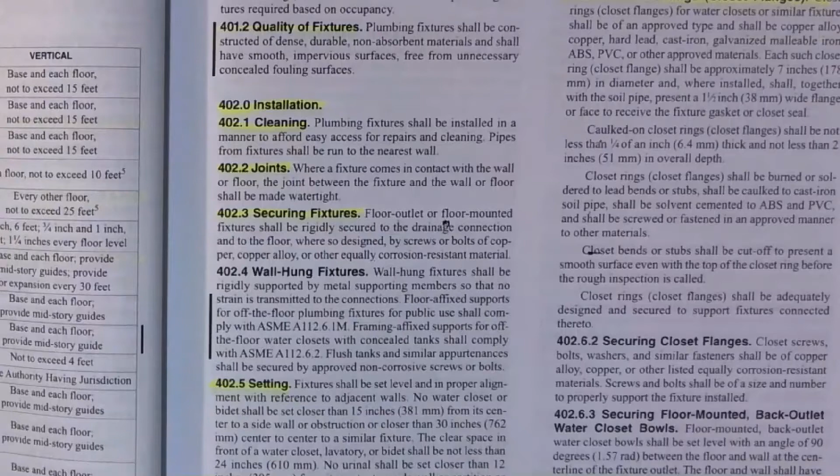Then we have Section 402.3, securing the fixtures. Floor outlet or floor mounted fixtures shall be rigidly secured to the drainage connection and to the floor where so designed by screws or bolts of copper, copper alloy, or other equally corrosion resistant material. We're going to cover that again, it's going to be repeated several times in the next few minutes. So they kind of deem it important to utilize some form of corrosion resistant material.

Section 402.5, setting. Fixtures shall be set level and in proper alignment with reference to the adjacent walls. No water closet or bidet shall be set closer than 15 inches from its center to a side wall or obstruction, or closer than 30 inches center to center to a similar fixture. The clear space in front of a water closet, lavatory, or bidet shall be not less than 24 inches. No urinal shall be set closer than 12 inches from its center to a side wall or partition, or closer than 24 inches center to center.

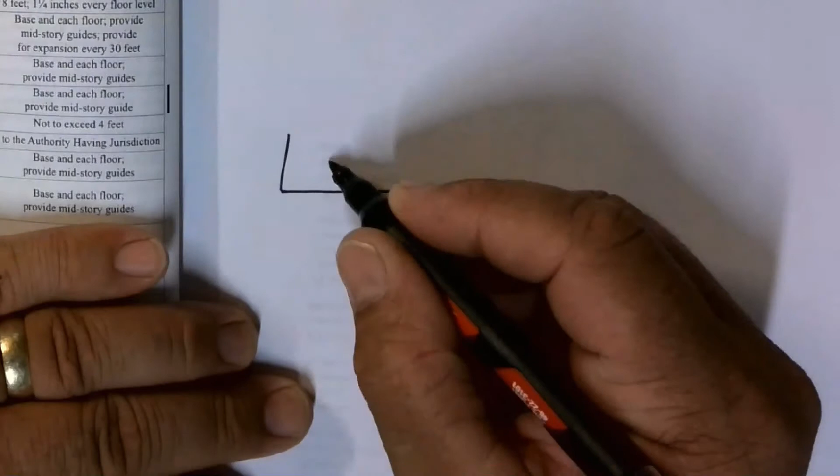So what that means is a water closet or toilet, the center of your water closet has to be no less than 15 inches. So we have a wall, and then we're going to have our water closet right there. There's your toilet. So this toilet from here to there is 15 inches, it can't be less than that. Plus it needs to be adjacent, which means it's running parallel to this side wall and adjacent to this back wall. That's what they mean by that.

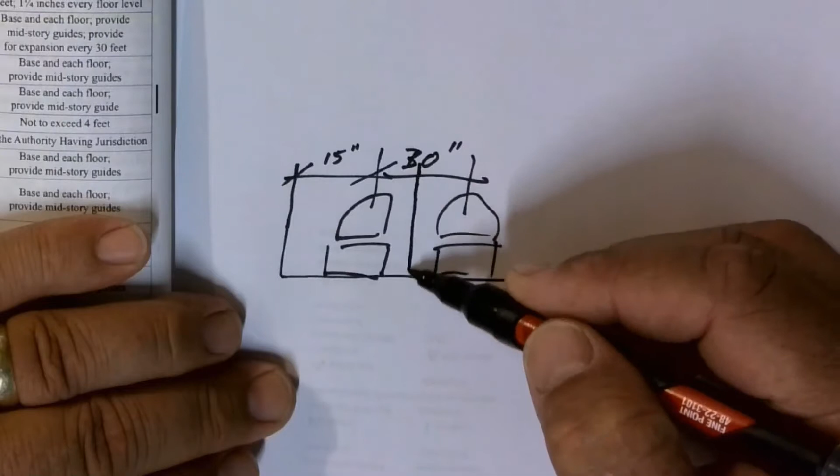And so if you had two toilets, what's the distance here? From its center to a sidewall or obstruction, or closer than 30 inches center to center to a similar fixture. So from here to here, 30 inches, okay? Because if you put a partition in here, that's 15 inches away. That's for the water closet.

The urinal, they make it 12 and 24. Keep in mind, everything that I mentioned in this lecture will probably be covered on the test. There is an exception: the installation of paper dispensers or accessibility grab bars shall not be considered an obstruction.

Section 402.6, flanged fixture connections. Fixture connections between drainage pipes and water closets, floor outlets, service sinks, and urinals shall be made using an approved copper alloy, hard lead, ABS, PVC, or iron flanges, caulked, soldered, solvent cemented, rubber compression gaskets, or screwed to the drainage pipe. The connection shall be bolted with an approved gasket, washer, or setting compound between the fixture and the connection. The setting compound is usually like a wax ring.

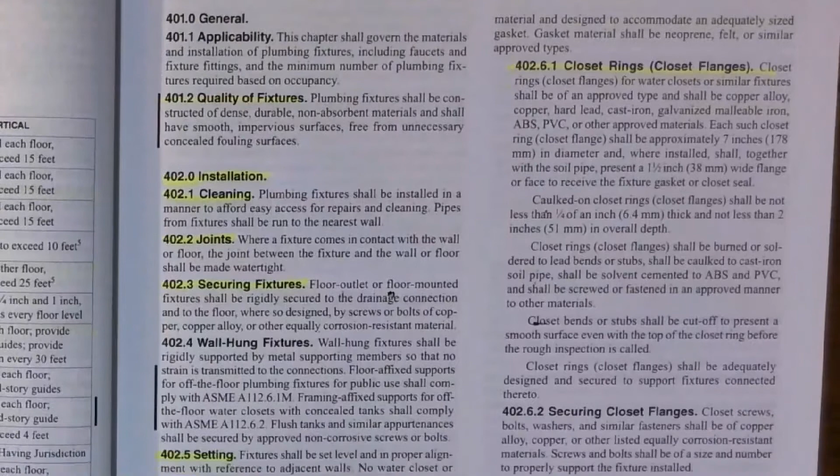Closet rings or closet flanges for water closets or similar fixtures shall be of an approved type and shall be copper alloy, copper, hard lead, cast iron, galvanized malleable iron, ABS, PVC, or other approved materials. Each such closet ring or closet flange shall be approximately 7 inches in diameter, and where installed shall together with the soil pipe present a 1.5 inch wide flange or face to receive the fixture gasket or closet seal.

That means from the edge of the hole outward is 1.5 inches on both sides, all the way around.

Caulked closet rings or closet flanges shall be not less than 1/4 inch thick and not less than 2 inches in overall depth. Closet rings or closet flanges shall be burned or soldered to lead bend or stubs, shall be caulked to cast iron soil pipe, shall be solvent cemented to ABS and PVC, and shall be screwed or fastened in an approved manner to other materials. The closet bend or stub shall be cut off to present a smooth surface even with the top of the closet ring before the rough inspection is called.

Closet rings shall be adequately designed and secured to support fixtures connected thereto. So it needs to be, like I said earlier, the bottom of the flange shall be set on an approved firm base because it needs to be secured and supported. You need to be able to secure and support your fixtures. And then it talks about securing your closet flange by using corrosion resistant materials.

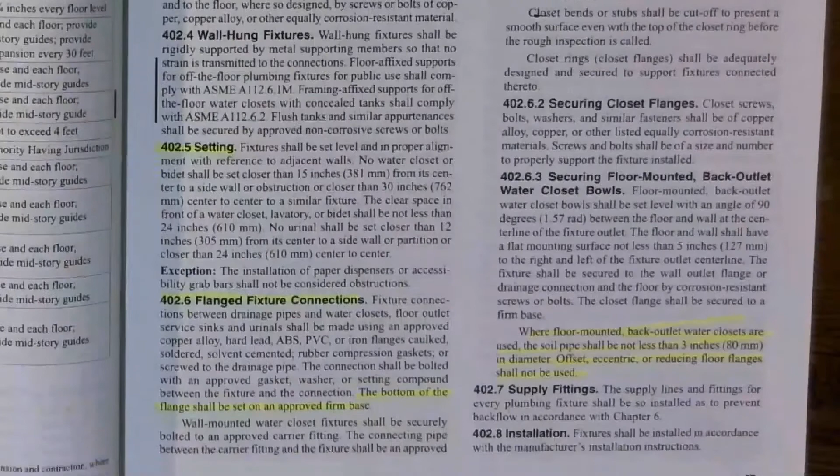402.6.3, securing a floor mounted back outlet water closet bowl. Floor mounted back outlet water closet bowls shall be set level with an angle of 90 degrees between the floor and the wall at the center line of the fixture outlet. The floor and wall shall have a flat mounting surface not less than 5 inches to the right and left of the fixture outlet center line. The fixture shall be secured to the wall outlet flange or drainage connection and the floor by corrosion resistant screws or bolts. The closet flange shall be secured to a firm base. Where floor-mounted back outlet water closets are used, the soil pipe shall be not less than 3 inches in diameter. Offset, eccentric, or reducing floor flanges shall not be used.

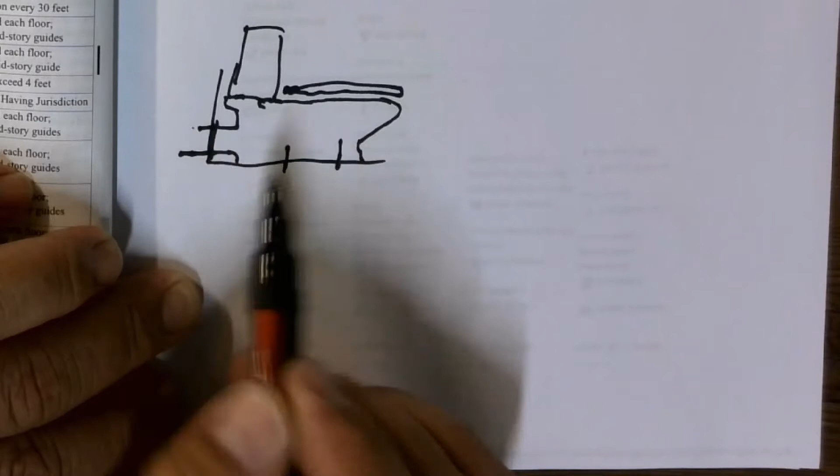First off, real quick, here you have a different type of water closet. It's floor mounted, so it does get mounted on the floor. However, the waste - so there's my crude attempt at a water closet. Your bolts go in here and they get mounted onto the floor. But it's a back outlet, so it comes out the wall right here, and your waste goes out there instead of this way. So that's what I mean by a wall outlet, floor mount water closet.

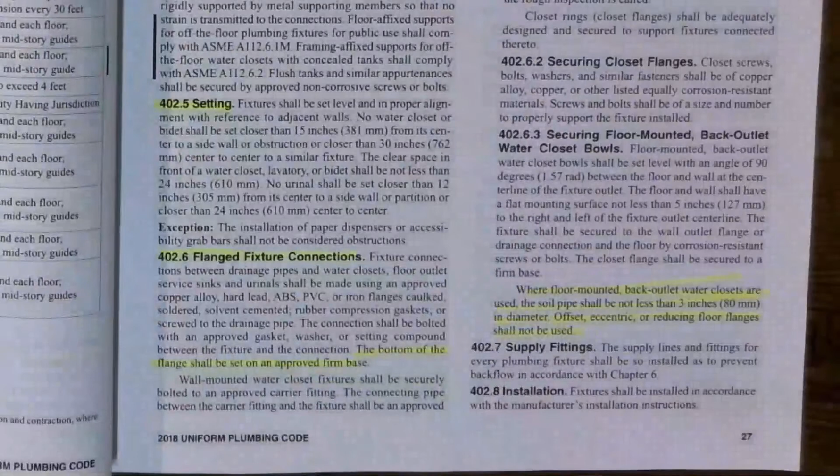Let's turn the page and go over here. 402.10. Fixtures having concealed slip joint connections shall be provided with an access panel or utility space not less than 12 inches in its least dimension and so arranged without obstructions as to make such connections accessible for inspection and repair. And we talked about slip joint couplings before, or a slip joint connection.

All it really is, is a threaded connection, where the tubing goes into one side and a compression fitting tightens it up. You cannot hide those.

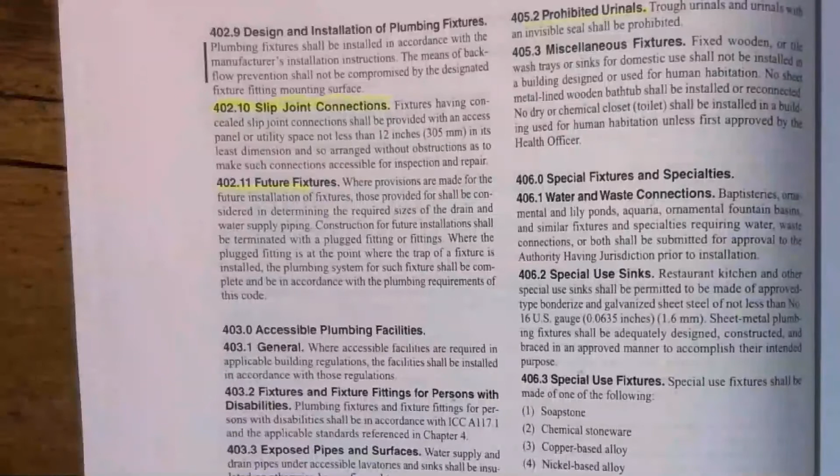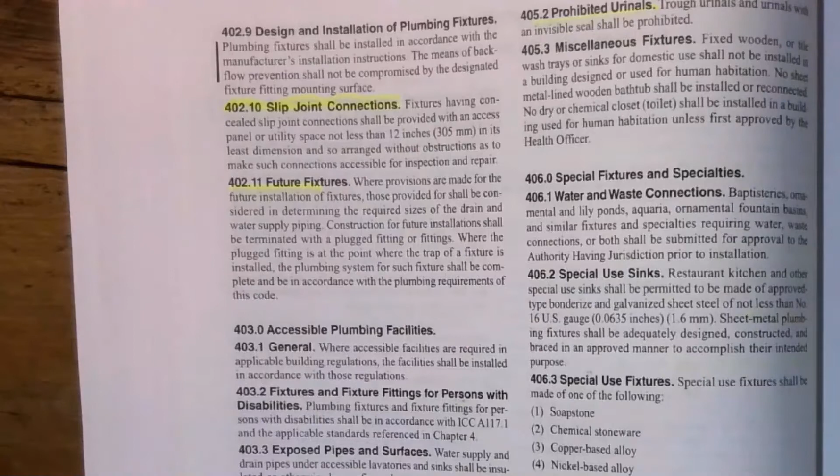Future fixtures. Where provisions are made for the future installation of fixtures, where you're going to put something in, those provided for shall be considered in determining the required sizes of the drain and the water supply piping. So whatever type of future fixture you're planning on putting in, you need to make sure you know what the requirements are so you can properly run that size. The construction for future installation shall be terminated with a plugged fitting or fittings. Where the plugged fitting is at the point where the trap of a fixture is installed, the plumbing system for such fixture shall be complete and be in accordance with the plumbing requirements of this code. So if you're going to be putting in a future fixture, you need to make sure you know exactly the right size, what it's going to take, what kind of volume it has, and you're going to have to implement that into your sizing calculations to make sure that your system doesn't get starved out after installing it at a later date.

We're going to talk a little bit here about overflows. Where a fixture is provided with an overflow, the waste shall be so arranged that the standing water in the fixture shall not rise in the overflow where the stopper is closed or remain in the overflow where the fixture is empty. The overflow pipe from a fixture shall be connected to the house or inlet side of the fixture trap, except that overflow on flush tanks shall be permitted to discharge into the water closets or urinals served by them, but it shall be unlawful to connect such overflows with any part of the drainage system. So we have a couple of things here.

See if I can explain it to you in such a way that makes total sense.

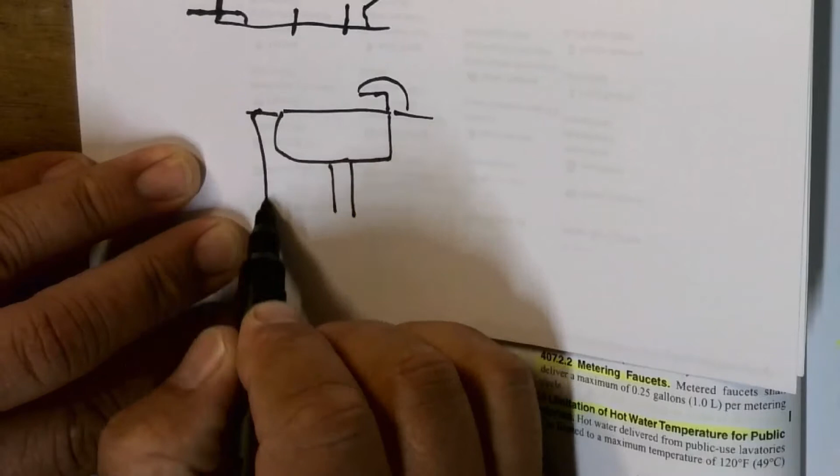So here we have a lav. We'll put our little faucet right here. So there's your faucet, there's your lav, and here's your waste coming down, which is your fixture drain. On the front face, because this is the front of the counter, and this will be the top backsplash. Okay, so right here you have a couple of holes right there on the lav. Those are your overflows. Those are connected to an overflow pipe that's either built into the lav or external. And that ties into the fixture drain right here.

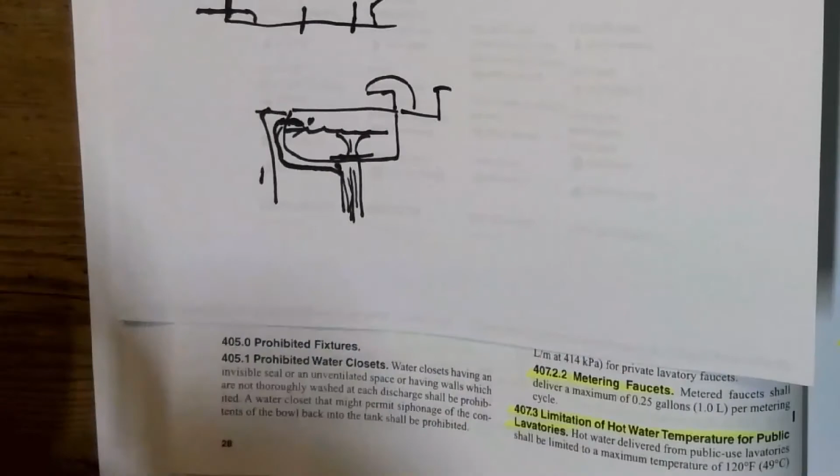So if you do plug it and the water level rises, this plug is not going to inhibit this overflow from taking the water and draining it out. And when you do unplug it and all the water goes down, this overflow will stay open. So that's what those little holes are right there for the lav. That is to ensure that this water doesn't kind of creep up over the flood level rim and drain out over the counter. The other one they were talking about is the overflow for a water closet.

If you open up the tank of a water closet, you'll see you have the flush control, and it's got the little ball deal on there, and it's got the little diaphragm, and that is connected on the bottom. And then you have this overflow that's right in the middle, and it's a hole. It's a pipe with a hole on it. But on that, you also have the flapper, and then the drain itself. So all the water goes down inside here, and then this flapper drops back down, and the water level rises until this float stops it.

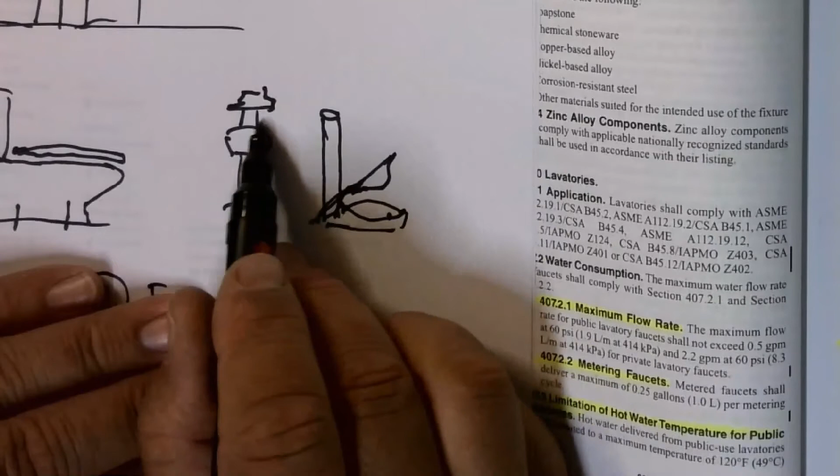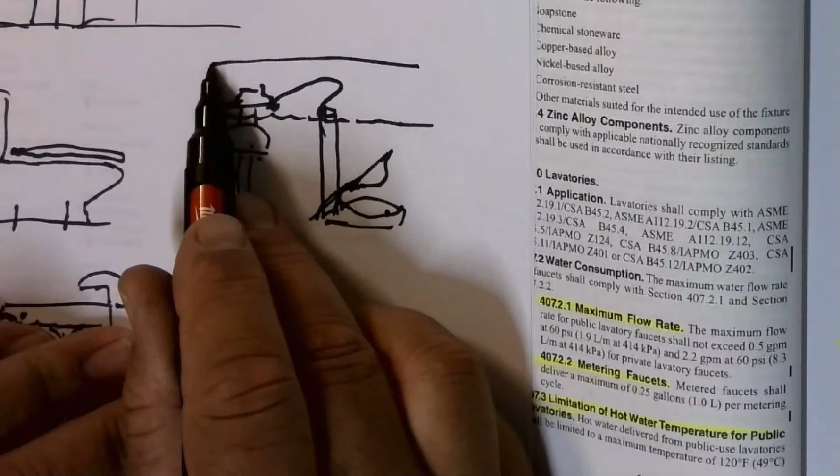This is the top of the tank right there. If the water level rises inside the tank and it goes over this overflow - oh, there's also a little hose that runs over to this point and drains down inside here. This is aiding inside the bowl. This is filling water into your overflow, which is kind of scouring the bowl as it's filling. So that's what this does here. And this overflow, if this water continues to go, you're not going to go ahead and overflow your tank. This is going to go into the bowl and drain out. So those are the two things about the overflows.

Wow, there we go. I wanted to mention this, section 405.2. Trough urinals and urinals with an invisible seal shall be prohibited.

It was a sad day when that came out because I can remember the trough urinals. It was like a meet and greet, you know, you just show up and stand there next to somebody and ask them how their day was while you were relieving yourself. It was sad, but I understand why, because it's disgusting.

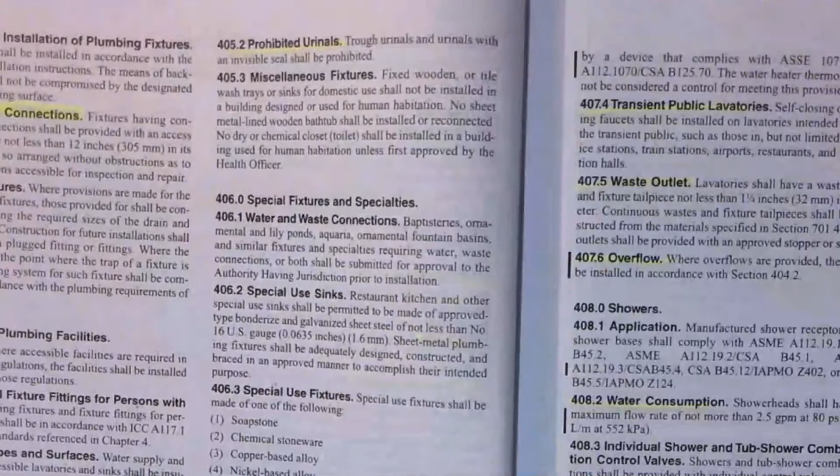So I'm going to post a couple of videos next to this link for this chapter, and it's going to show a couple of urinals that are pretty unique. One of them is at a place called the Madonna Inn, and it's really cool. I was told by my Plumbing 1 instructor about it, and it just so happened to coincide with my honeymoon. And on my honeymoon, driving up north, it's up in San Luis Obispo, I told my wife that we needed to stop off at this place just so I could use the bathroom. And I went in, and it was a freaking cool bathroom. It was really neat. So I'm going to show you a video of it, or at least put it next to this link, and you will like it. It's pretty cool. It's pretty neat.

Bottom line is, I went to go use the bathroom, and while I was using that urinal, two old ladies came in to ask if they could film or take a picture of the attraction, and I thought they were talking about me, but they were actually talking about the urinal.

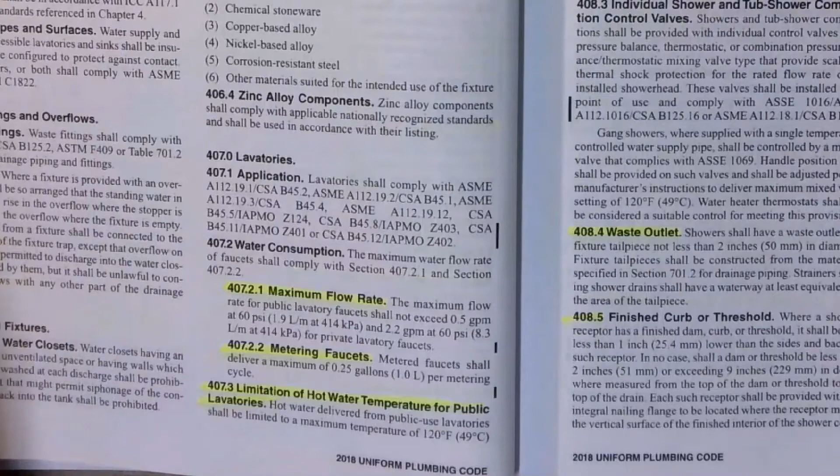Section 407.2.1, maximum flow rate. Now we're here talking about section 407. Section 407 is lavatories, and a lavatory is the sink that's in the bathroom, used for washing your face.

So the maximum flow rate for a public lav faucet shall not exceed 0.5 gallons per minute at 60 psi, and 2.2 gallons per minute at 60 psi for a private lav faucet.

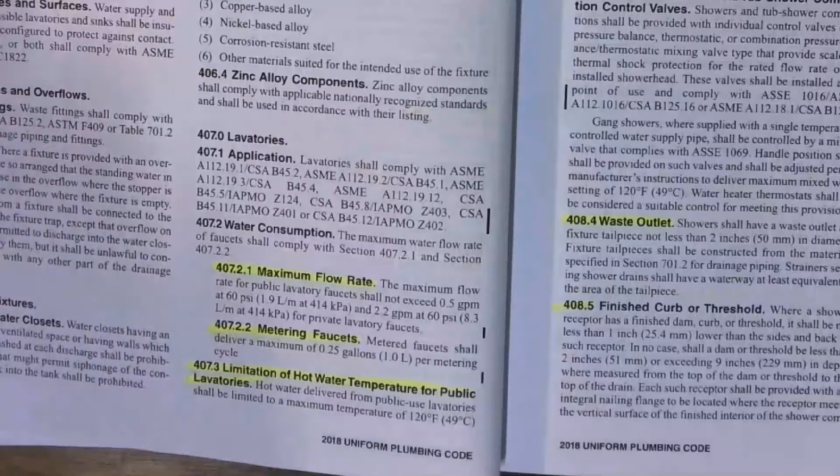Now we have metered faucets, section 407.2.2. They shall deliver a maximum of 1/4 of a gallon per metering cycle. In other words, those are the ones that come on automatically, or you have to press down and it'll supposedly last you at least 1/4 of a gallon.

I tell you, over time, those faucets where you have to press the button and keep it going need to be adjusted. How many of you have gone down and depressed it, had to keep your hand on it, then realize that isn't going to work, so now you have to keep your elbow on it while trying to contort your hand underneath the water flow to wash it. It's awful.

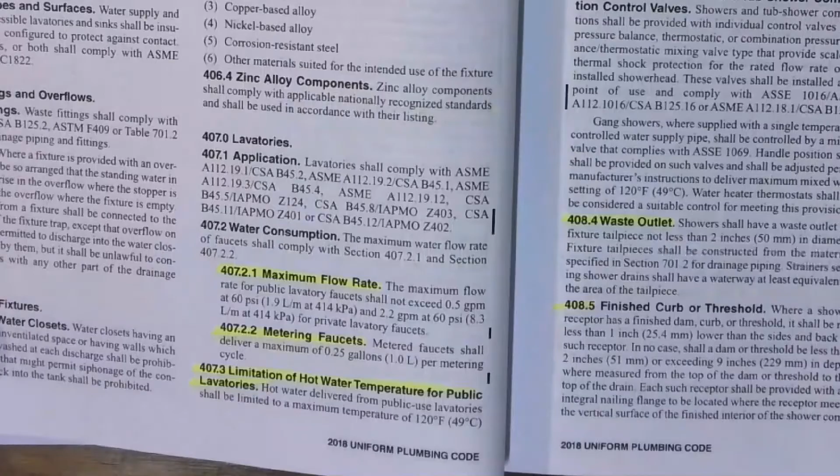And then the limitation of hot water temperature for a public lav. Hot water delivered from public use lavs shall be limited to a maximum temperature of 120 degrees Fahrenheit by a device that complies with the following standards. And the water heater thermostat shall not be considered a control for meeting that provision.

And then transient public lavatories, section 407.4. A transient public lav is one meant for the general public, where they're just in and out. It's not like a public restroom in a restaurant or anything like that. This is one that's out there, like the one at the beach or the park. That's what they're talking about here.

Self-closing or metering faucets shall be installed on lavatories intended to serve the transient public, such as those in, but not limited to, service stations, train stations, airports, restaurants, and convention halls.

Waste outlet: lavatories shall have a waste outlet and fixture tailpiece not less than 1.25 inches in diameter. The continuous waste and fixture tailpieces shall be constructed from the material specified in section 701.4. So everything that pertains to waste is always going to reference chapter 7 as far as materials go, because chapter 7 is sanitary drainage.

Waste outlets shall be provided with an approved stopper or strainer. And then the overflow: where overflows are provided, they shall be installed in accordance with section 404.2, which we already went over.

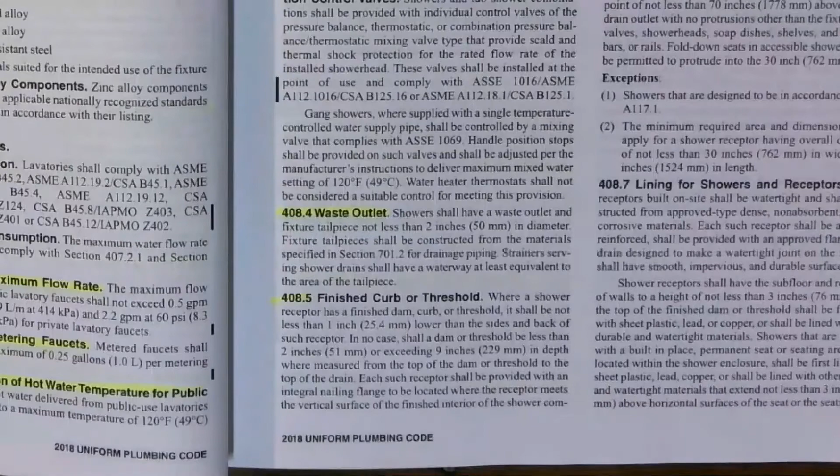What they mean by that is all the holes that are in the strainer at the bottom of the shower, your drain, all those holes have to equal the measurement of your pipe.

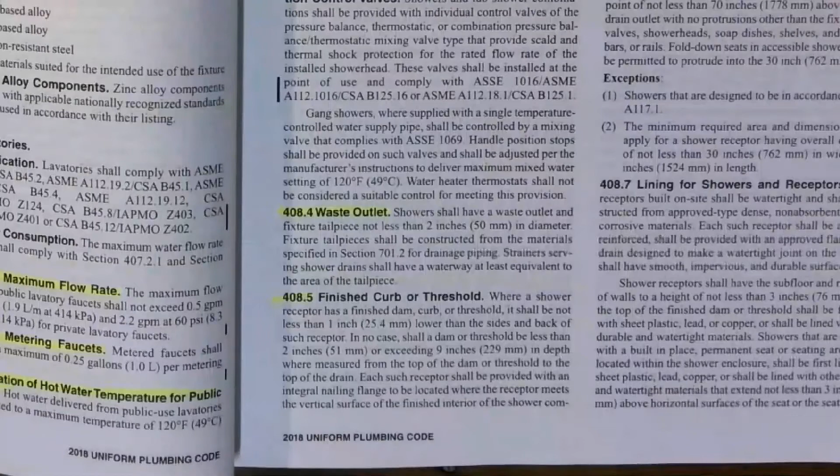Waterway at least equivalent to the area of the tailpiece. So if it's a 2-inch tailpiece, which it is because it says so right here, all those little holes, when you add them all up, need to equal the same surface area as a 2-inch tailpiece. The finished curb or threshold.

Where a shower receptor has a finished dam, curb, or threshold, it shall be not less than 1 inch lower than the sides and the back of the receptor. In no case shall a dam or threshold be less than 2 inches or exceed 9 inches in depth, measured from the top of the dam or threshold to the top of the drain. So when you measure from the top of the dam to the actual drain itself, it's 2 inches minimum and not more than 9 inches deep. The dam itself is not less than 1 inch lower than the sides and back of the receptor.

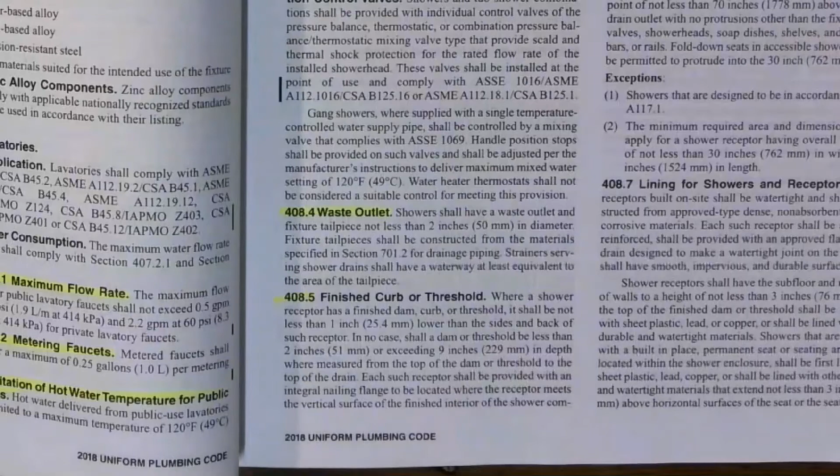Each such receptor shall be provided with an integral nailing flange to be located where the receptor meets the vertical surface of the finished interior of the shower compartment.

The flange shall be watertight and extend vertically not less than 1 inch above the top of the sides of the receptor. The finished floor of the receptor shall slope uniformly from the sides towards the drain, not less than 1/8 of an inch per foot, nor more than 1/2 inch per foot.

The threshold shall be of sufficient width to accommodate a minimum 22-inch door. So your door is a minimum of 22 inches. The shower door shall open so as to maintain not less than a 22-inch unobstructed opening for egress. So not only is your door a minimum of 22 inches, but the entryway has to be at least 22 inches.

The immediate adjoining space to showers without thresholds shall be considered a wet location and shall comply with the requirements of the building, residential, and electrical codes. The exceptions are showers in accordance with section 403.2.

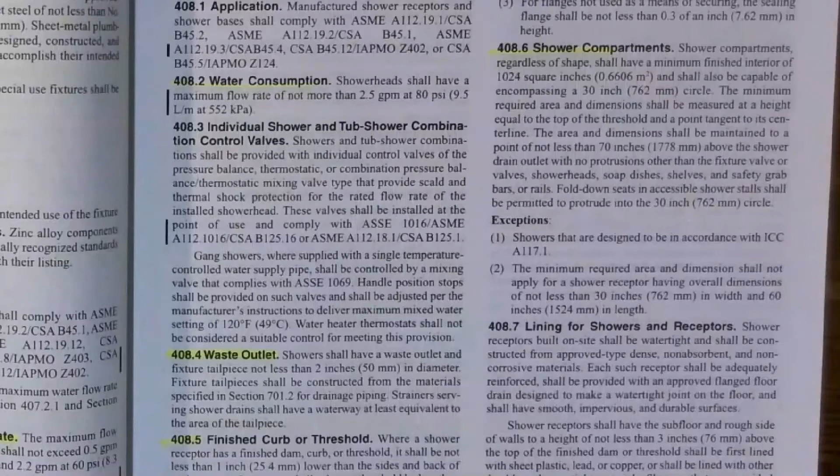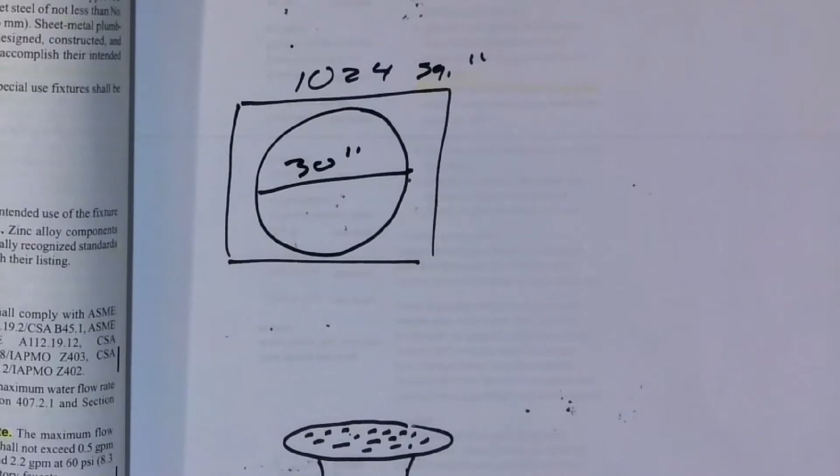So that whole code section essentially just says this. So here we have a shower stall, okay? And the minimum requirement for that shower stall is 1,024 square inches. In this square, you have to be able to have a 30-inch circle. It has to be in there.

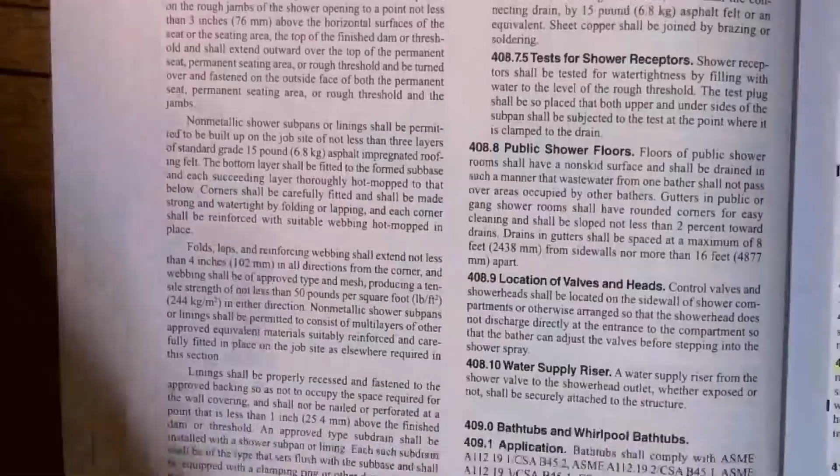We'll go ahead and turn the page. Come over here. Remember I told you that section 408 was the largest one? Because here we're talking about making the shower pans using PVC, CPE, sheet lead, sheet copper. All of this pertains to making your shower receptor, including the tests, and all kinds of stuff.

Now, this one I should have highlighted because I wanted to share this with you, and I apologize. Public shower floors. Floors of public shower rooms shall have a non-skid surface and shall be drained in such a manner that wastewater from one bather shall not pass over areas occupied by other bathers. Keep your wastewater to yourself.

The gutters in a public or gang shower room shall have rounded corners for easy cleaning and shall be sloped not less than 2% toward the drains. The drains in the gutters shall be spaced at a maximum of 8 feet from the sidewalls, nor more than 16 feet apart.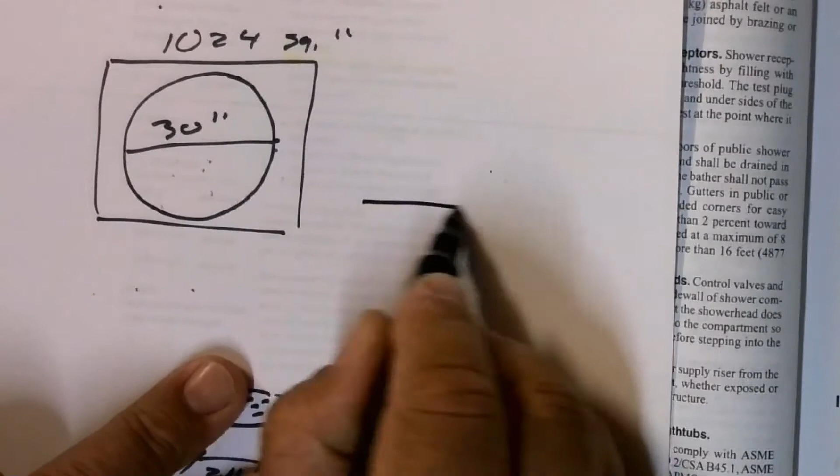So cross-section area here, you have a gutter like this. So the person stands here, and we're going to give him some shorts, because we're just giving him shorts. So he stands there, he gets his shower. His water goes into this drain, and this drain has several drains all over the place. They go to the back wall, and then they get vented, the whole bit. Okay?

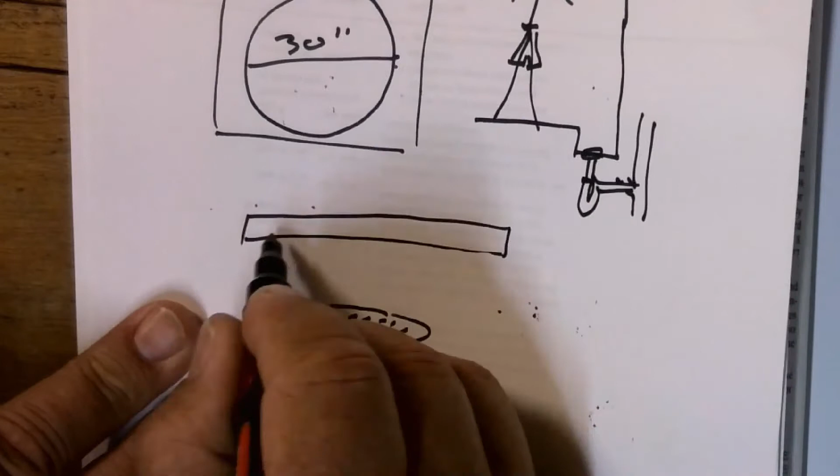Cross-section area of the gutter itself, we'll say we have one there, and this is 8 feet, and that's 8 feet, because that is the maximum distance they can go, okay? Can they be closer? Yes, they can, because it says right here, a maximum of 8 feet from the sidewall. So they can be closer than 8 feet, but it goes at 2%. And if I have one more right here, spread at the maximum distance, okay?

So let's say I have 3 drains. What is the maximum distance this gutter can be? Well, the spread between drains is 16 feet. So here we have 16, 32, 48 feet, right? 48 feet for 3 drains. That's a lot. That's a lot of showers, okay?

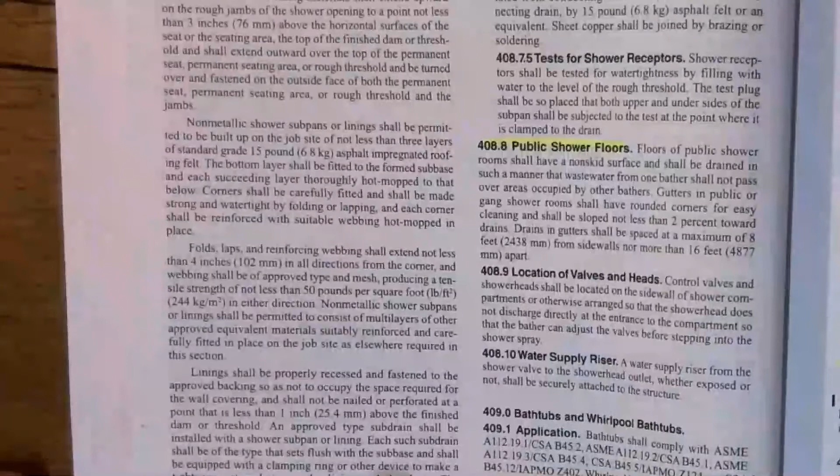So I wanted to go over that section.

Now we can talk about bathtubs and the waste outlet for a bathtub. Bathtubs and whirlpool bathtubs shall have a waste outlet and fixture tailpiece not less than 1.5 inches in diameter. Fixture tailpieces shall be constructed from the material specified in section 701.2 for drainage piping. The waste outlet shall be provided with an approved stopper or strainer.

So a bathtub drain is 1.5 inches and the shower is 2 inches. The reason is the shower has a smaller area for the water to collect, and if you run a 1.5 inch drain, the water will start to rise and go over the shower receptor itself. So the shower drain requires a larger size in order to maintain that there's no standing water.

A bathtub is 1.5 inches because it has the overflow, and the overflow for the bathtub is there. Plus it's a standing water setup anyway, and it's designed to maintain a section of standing water.

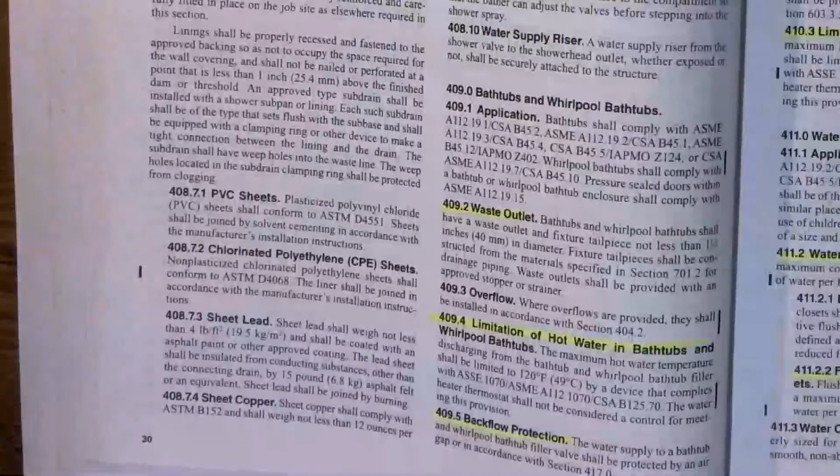The limitation of hot water in a bathtub and a whirlpool tub: the maximum hot water temperature discharging from the bathtub and whirlpool bathtub filler shall be limited to 120 degrees by a device that complies with the following standards. The water heater thermostat shall not be considered a control for meeting this provision.

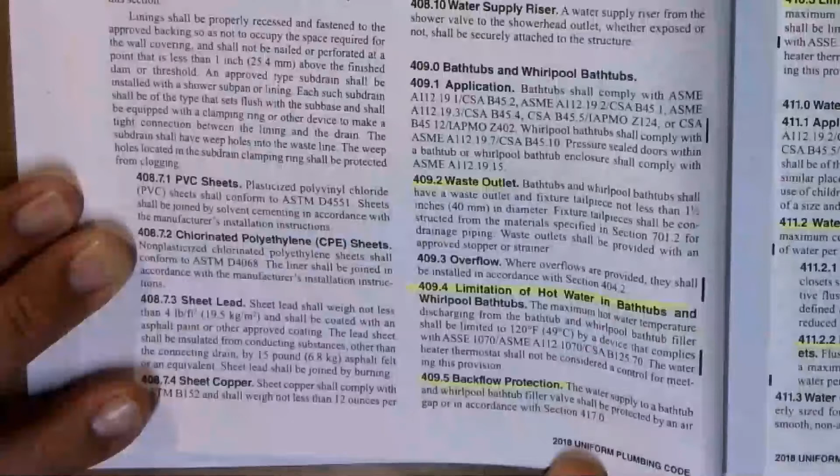Backflow prevention or protection: the water supply to a bathtub and whirlpool bathtub filler valve shall be protected by an air gap, or in accordance with section 417. So you have to have an air gap, which is fine because the spout that comes out for the bathtub usually sits a few inches above the flood level rim anyway, and that's because it's providing you with your air gap.

I used to work with a guy who called a bidet a bidet. And I told him, it's not a bidet, it's a bidet. And he's like, well, I always heard bidet. And I said, no, that's the guy on the radio commercials for the Motel 6. Tom Bodett will keep the light on for you. I don't know if any of you remember that commercial, but...

Section 410.3, limitation of water temperature in a bidet. Up until this point, the hot water has been limited to 120 degrees for everything, but the bidet is different. The maximum hot water temperature discharging from a bidet shall be limited to 110 degrees by a device that complies with the following standards, and again the water heater thermostat shall not be considered the control for meeting that provision. You want less than 110 because it starts to get a little warm, and that area where the bidet operates is a bit of an anatomical sensitivity location.

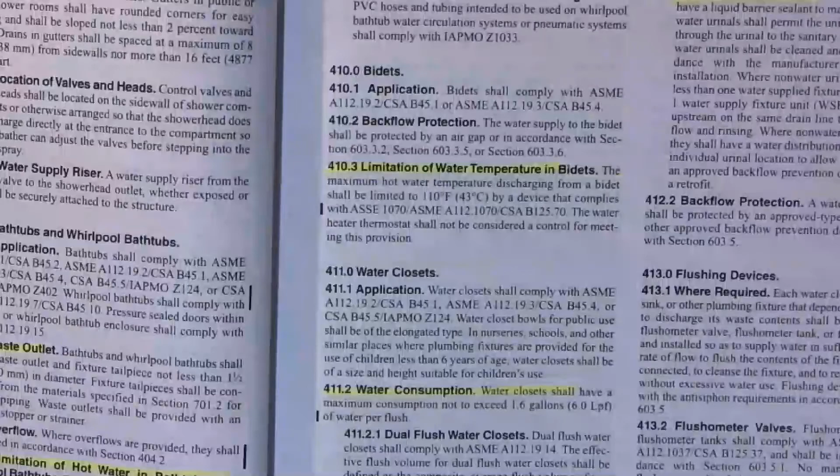Water closets, section 411. 411.2 water consumption: based on this code, water closets shall have a maximum consumption not to exceed 1.6 gallons of water per flush. Then down to the flushometer valve activated water closet—these are your commercial water closets. The flushometer valve activated water closet shall have a maximum flush volume of 1.6 gallons per flush.

I like talking about these urinals. Urinals, based on this code—now I've installed plenty that have less than this, okay—urinals shall have an average water consumption not to exceed 1 gallon of water per flush. I have put in half gallon per flush, okay, and again this is based on the Uniform Plumbing Code.

Most places where you install urinals have it specified that you're going to use low consumption or non-water urinals. I'm reading you this section because I think this is one of the more important sections in this chapter, okay? Non-water urinals shall have a liquid barrier sealant to maintain a trap seal. Non-water urinals shall permit the uninhibited flow of waste through the urinal to the sanitary drainage system. Non-water urinals shall be cleaned and maintained in accordance with the manufacturer's instructions after installation.

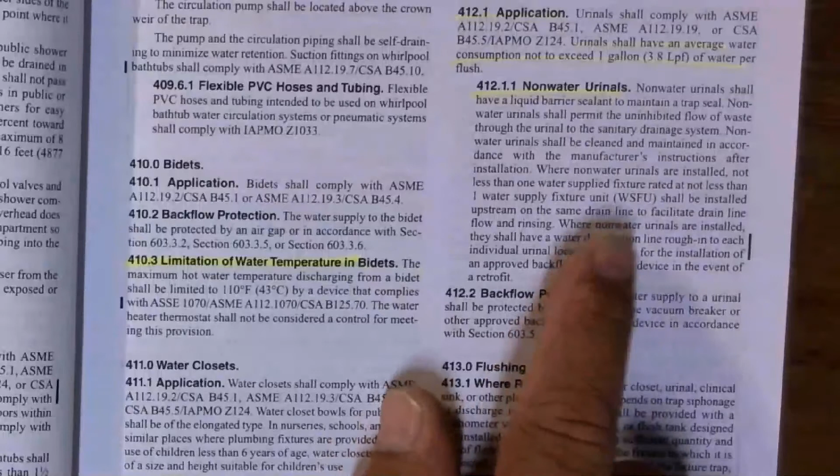So this last sentence here: you still have to run the water line. You just don't connect it to a flush valve. You have to run it, and it has to be behind the wall. They call it 'in the event of a retrofit.' I call it when they come to their senses and realize what a mistake they made putting in one of these non-water urinals to begin with. The water's there—they can just open up the wall, hook up their flush valve, and call it good.

That's it for this page. We're almost done. Almost. I don't know why I always do that.

Dishwashing machines. Section 414.2.

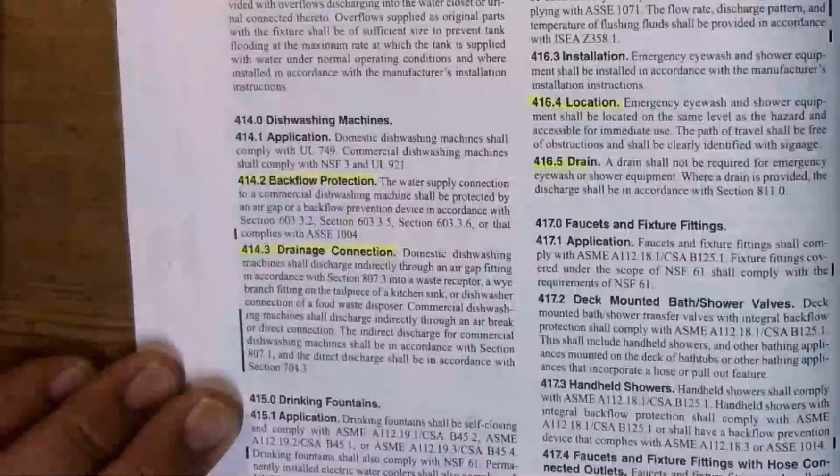The water supply connection to a commercial dishwashing machine shall be protected by an air gap or backflow prevention device in accordance with Section 603.3.2, Section 603.3.5, Section 603.3.6, or that complies with ASSE 1004. So you have to have some form of a back check so that the water being supplied into the commercial dishwashing machine—now it's commercial—is protected.

Drainage connection. Domestic dishwashing machines shall discharge indirectly through an air gap fitting in accordance with Section 807.3 into a waste receptor, a Y-branch fitting on the tailpiece of a kitchen sink, or a dishwasher connection of the food waste disposer.

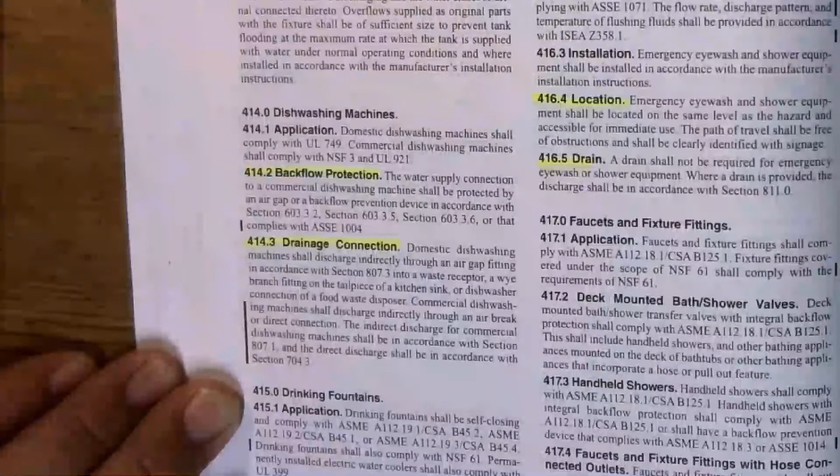The commercial dishwashing machine shall discharge indirectly through an air break or direct connection. The indirect discharge for a commercial dishwashing machine shall be in accordance with Section 807.1, and the direct discharge shall be in accordance with Section 704.3.

That's for commercial. I'm interested in the domestic. That domestic dishwashing machine has to go through an air gap fitting. Remember this—this is required. Now what I'm saying about this is because I get a lot of questions on this one. A lot.

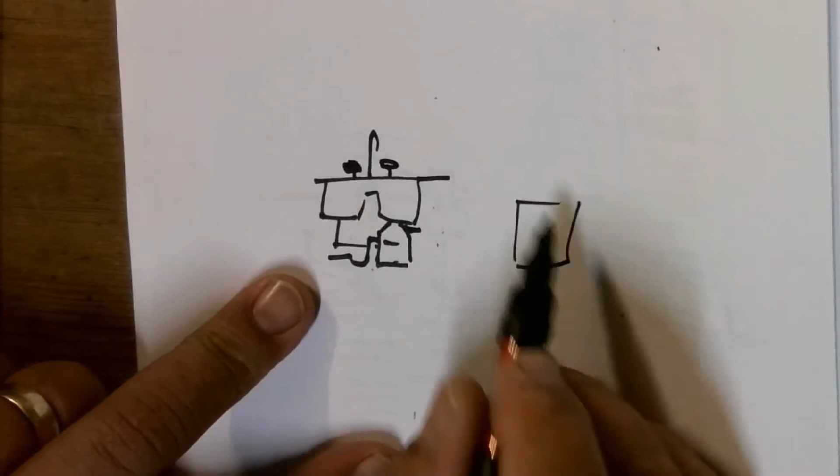Dishwasher. Sink over here. Garbage disposal, right? So here's a little outlet right there. So here's your sink. This dishwasher discharge on the drain has to go up to an air gap, and then from there it needs to go down and tie in to the garbage disposal connection.

The argument is we don't need this—we just need to take this discharge. The manufacturer says all we have to do is take this and run it up as high as we possibly can underneath the counter and bring it all the way back in. Well, that's fine, the manufacturer can say that.

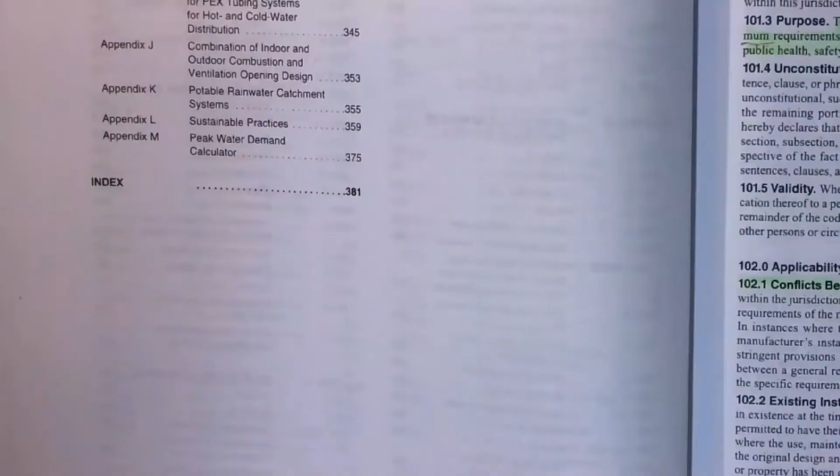But based on our municipality, based on the state of California and their adoption of this code, this is the more stringent requirement. Now remember, going all the way back to Chapter 1, we'll read this section right here.

Where there is a conflict between a general requirement and a specific requirement, the specific requirement shall prevail. And where the requirements within this jurisdiction of the plumbing code conflict with the requirements of the mechanical code, this code shall prevail. In instances where this code, applicable standards, or the manufacturer's installation instructions conflict, the more stringent provision shall prevail. Well, guess what's more stringent?

This is more stringent because you actually have to install an air gap. The other one, you don't. So this is the way you have to do it, based on this chapter and Chapter 1.

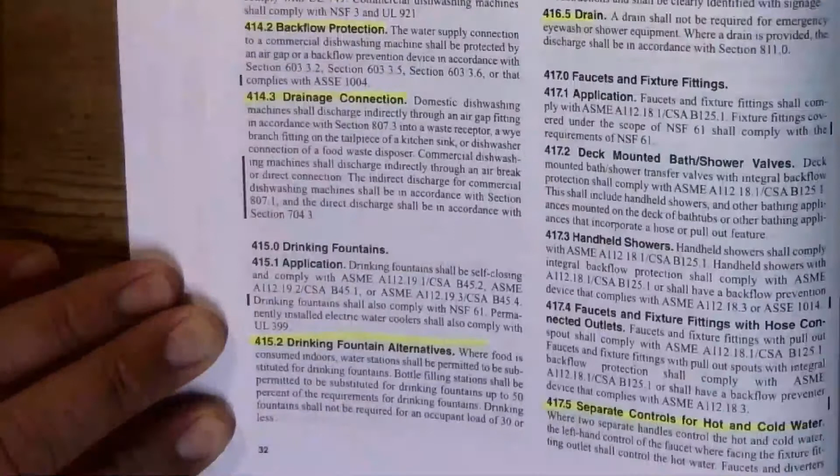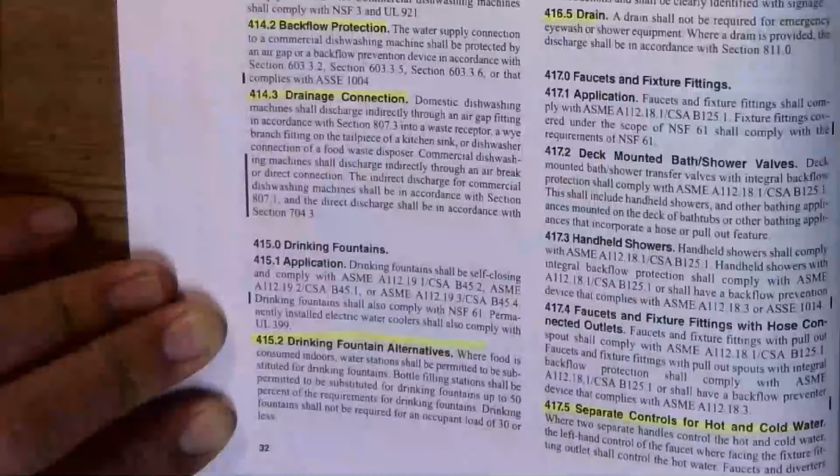Our guy who worked at the plumbing company I was working for at the time told her she needed to have an air gap put in, and it was a special concrete countertop. So she had somebody drill the hole for the countertop, which came in later, and then she brought in the dishwashing machine. She told them, please hook up the air gap. The guy said, you don't need the air gap because the dishwasher instructions say you don't need to do it. So she threatened to sue us for essentially telling her the wrong information. I had to pull out the code section, chapter 1, chapter 8, section 807.3, everything, show her in writing that this is our code. And then I explained in detail why you have to have the air gap. You do not want the waste backing up on your drain line, your kitchen sink, where your dishwasher's hooked up. If that were to ever back up, where do you think that hose is going to go? It's going to go straight into your dishwasher where you wash your dishes. Do you want dirty water in your dishwasher? Come on, that's why you put the air gap in there, to prevent that from happening.

Section 415.2, drinking fountain alternatives. Where food is consumed indoors, water stations shall be permitted to be substituted for drinking fountains. A bottle filling station shall be permitted to be substituted for drinking fountains up to 50% of the requirements for the drinking fountain. So if I need 20 drinking fountains, 10 of them can be bottle fillers. Drinking fountains shall not be required for an occupant load of 30 or less.

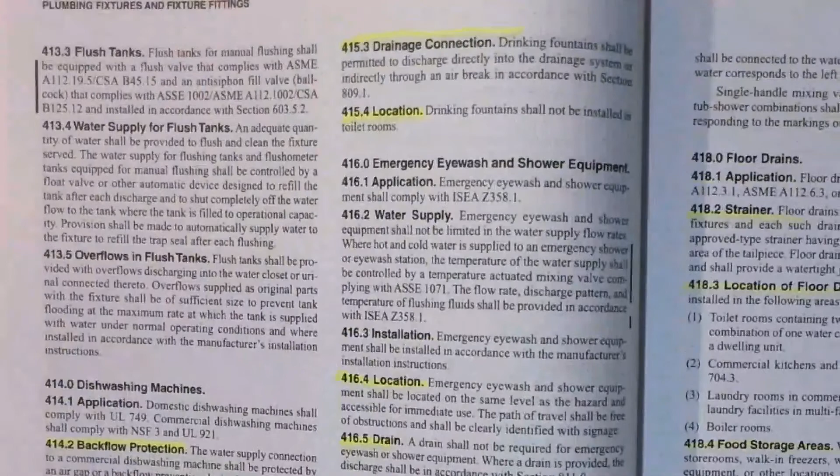Section 415.3 - I believe you may have already had a question on this. Drinking fountains shall be permitted to discharge directly into the drainage system or indirectly through an air break in accordance with Section 809.1. And the location: drinking fountains, unfortunately, shall not be installed in a toilet room. I think you understand why. I hope you understand why you don't want to put a drinking fountain in a restroom, especially in a public restroom where somebody's like, screw it, I have to go so bad I can't wait in line anymore, I'm using the drinking fountain.

It's amazing that we have to put some of these code sections in, isn't it? I mean, a lot of it's common sense, but if it's not in there, people will put it in.

Section 416.4 - 416 deals with emergency eyewash and shower equipment. Emergency eyewash and shower equipment shall be located on the same level as the hazard and accessible for immediate use. The path of travel shall be free of obstructions and shall be clearly identified with signage. Section 416.5: a drain shall not be required for emergency eyewash or shower equipment. Where a drain is provided, the discharge shall be in accordance with Section 811.0. Now, Chapter 8, because it's referring to a lot of these indirect locations, Chapter 8 in of itself is indirect waste. That's what Chapter 8 is all about.

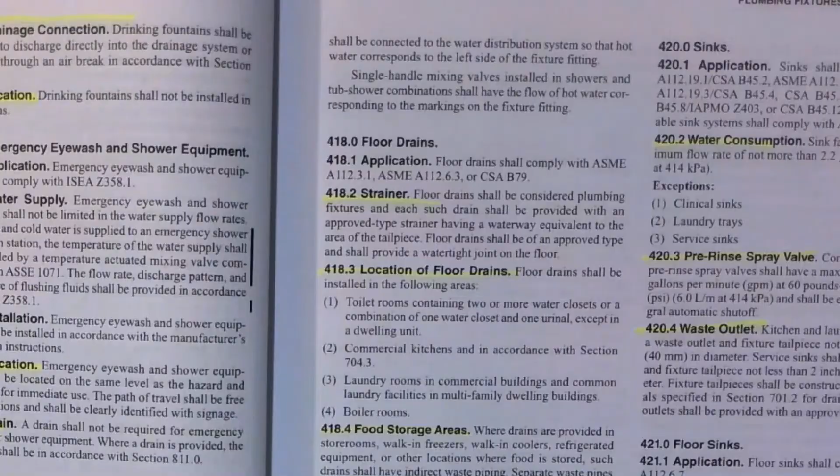Section 417.5, separate controls for hot and cold water. I always neglect to tell you what we're talking about here - we're talking about faucets and fixture fittings, Section 417. Where two separate handles control the hot and cold water, the left-hand control of the faucet, when facing the fixture fitting outlet, shall control the hot water. The faucets and diverters shall be connected to the water distribution system so that hot water corresponds to the left side of the fixture fitting. Single handle mixing valves installed in showers and tub shower combinations shall have the flow of hot water corresponding to the markings on the fixture fitting.

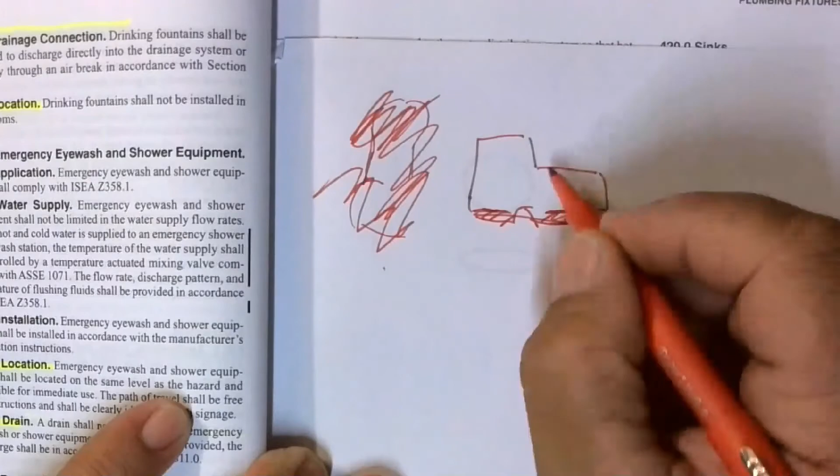Now I bring that up - I had a student one time, one of my more memorable students, came in late to class, and I made an assumption... oh gosh, no, that didn't look right. So here's his boot, okay? There's a boot - I did this in red because this is his left boot. His left boot was red. So he came in late and I was like, oh, were you doing some layout? And he said, no. I said, well, I figured you were painting the floor, saying this is where the hot line is going to go, this is where... He said, no, check this out. And he pointed to his left boot, which was red, and he said, hot's on the left. Then he pointed to his right boot, which was painted blue, and he said, cold's on the right. He said, I've been doing roughing all day.

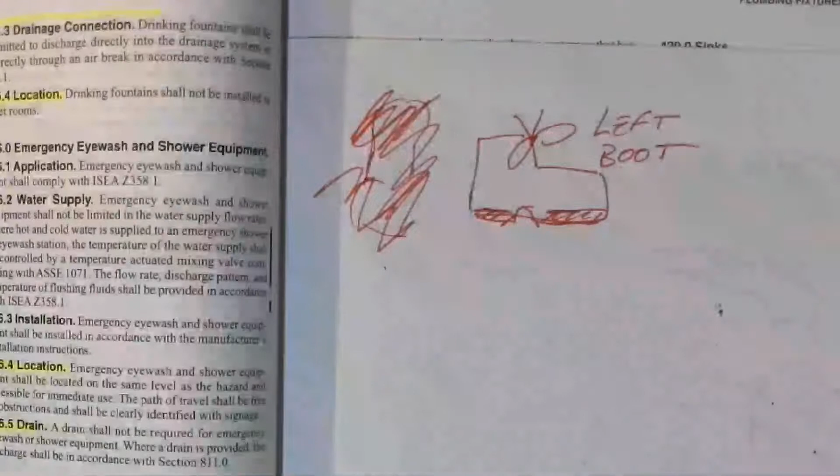And I said, well, that's fantastic. So you've been running copper pipe all day today? And he says, yeah, man, I was just going to town. And I said, and you followed this whole left red, hot line, you know? He said, yeah. And I said, well, what happens when you're working on the back side of the wall? Where are you going to be roughing in that hot line? And he said, oh, it's on the left side. I said, are you sure? Now think about this. And in front of the class, he said, no man, it's on the... and then he stopped and thought about it for a second. And he said, as he sunk his head, I have a lot of work to do tomorrow.

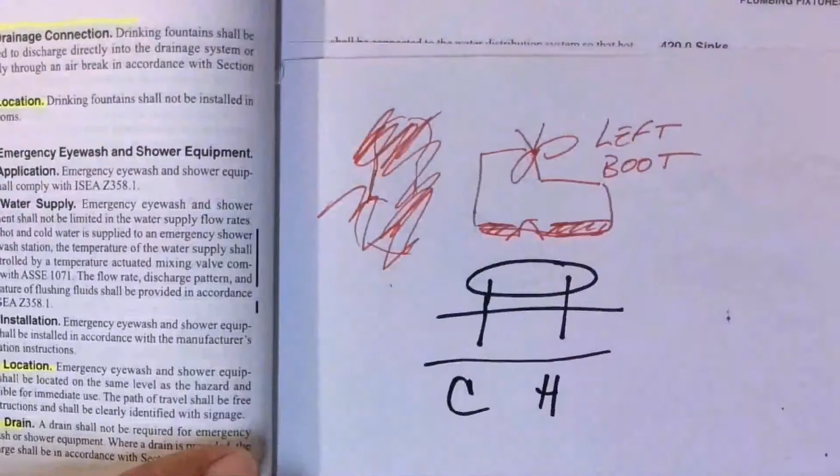Point being, here's your wall, there's your sink. If you're standing on this side, standing back here piping in, and you run your pipe stub out here and your pipe stub out here, which one is hot and which one is cold? This is hot and this is cold, because facing it from this side, as I'm facing my lav and standing right here wanting to wash my hands, cold's on the right, hot's on the left, right? But as you go on the back end and work on it from the back side, that's your correct rough-in. Cold's on the left because I'm behind the sink. Hot's on the right because I'm behind the sink. So yeah, he had it flipped and flopped, poor guy.

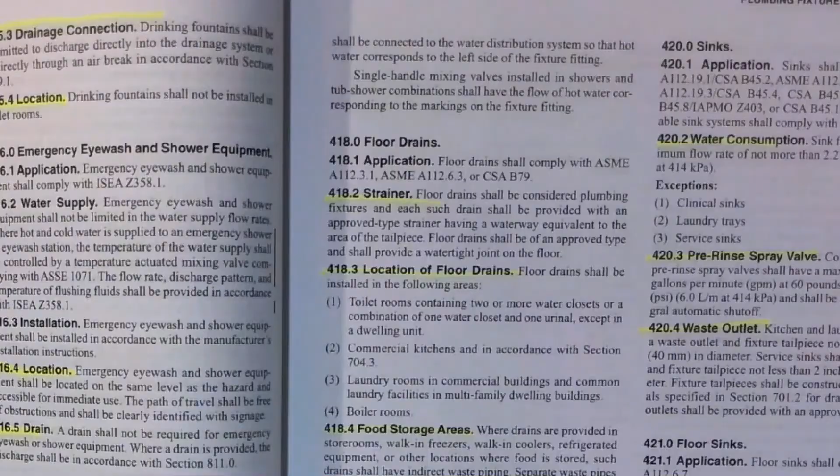Floor drains. Got to talk about floor drains real quick. Floor drains shall be considered plumbing fixtures, and each such drain shall be provided with an approved type strainer having a waterway equivalent to the area of the tailpiece. The floor drain shall be of an approved type and shall provide a watertight joint on the floor. It's very important about that.

Now, who's responsible for the watertight joint on the floor? Typically, the person doing the flooring, okay? As a contractor, you are not responsible for waterproofing the piping itself. For drains, shower drains, you're responsible for installing the drain, but the waterproofing is somebody else's job. Always check the contract so you're not on the hook for something that we do not specialize in.

Location of floor drains. Floor drains shall be installed in the following areas: a toilet room containing 2 or more water closets, or a combination of 1 water closet and 1 urinal, except in a dwelling unit. A commercial kitchen in accordance with section 704.3. Laundry rooms in commercial buildings and common laundry facilities in multifamily dwelling buildings, and in boiler rooms. So those are where you have to have floor drains.

Food storage areas. Again, we're still on section 418, floor drains, okay? Where drains are provided in storerooms, walk-in freezers, walk-in coolers, refrigerated equipment, or other locations where food is stored, such drains shall have indirect waste piping. Separate waste pipes shall be run from each food storage area, each with an indirect connection to the building sanitary drainage system. The trap shall be provided in accordance with section 801.3.2 of this code and shall be vented.

Indirect drains shall be permitted to be located in freezers or other spaces where freezing temperatures are maintained, provided that the traps, where supplied, shall be located where the seal will not freeze. Otherwise, the floor of the freezer shall be sloped to a floor drain located outside the storage compartment.

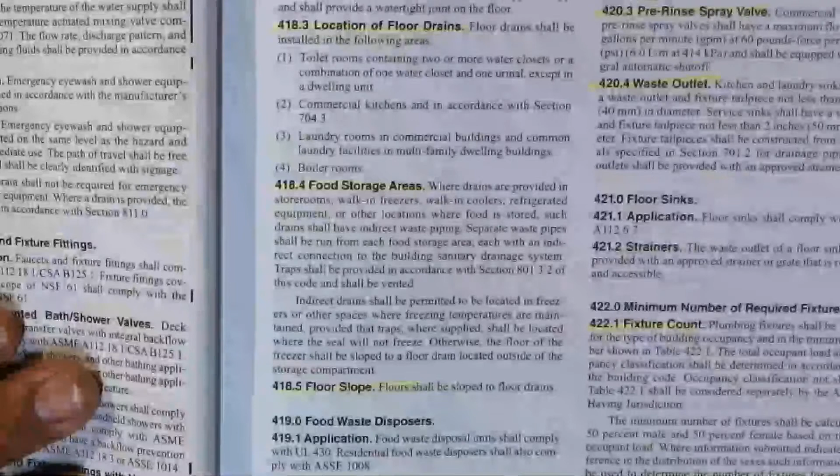Essentially what they're saying is, if you got a walk-in food storage location and you have a floor drain in there, obviously if there's a sewage backup, you don't want it coming up in your food storage. So you have to run that drain as an indirect drain into a floor sink. I refer you back at this point to the chapters 2 and 3 exam. In that illustration, I believe it was the 3rd or 4th question for the indirect drain pipe. It's essentially the same thing, just a little bit of a different application.

Floors shall be sloped to floor drains. You will be shocked to know how many floor drains are installed where the floor does not slope to the drain. It's like the drain is the high point in the actual floor, and that's unfortunate. I put that blame wholly on the plumber that installed it. They need to know how thick that floor is. They need to be able to set that floor drain low enough so that the guy who's screeding that concrete can actually run it to the drain with fall. So that is the plumber's responsibility to make sure that floor gets sloped properly. Every time I see that, it bums me out because it means the plumber didn't do his job right.

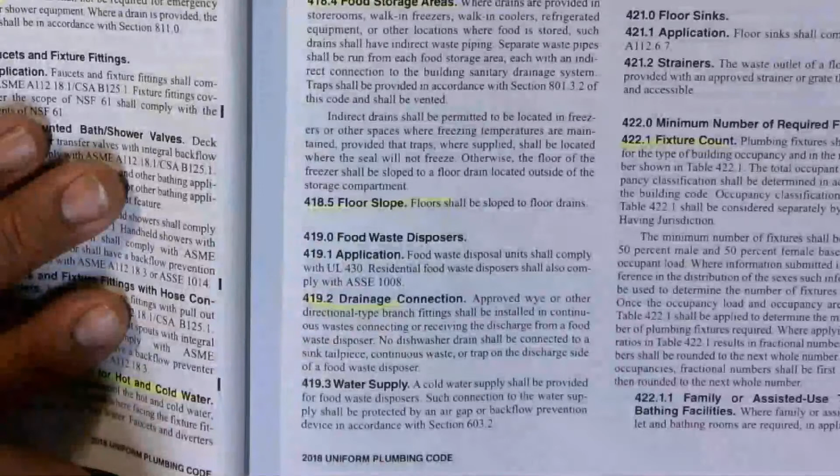Section 419, food waste disposer. Another name for a food waste disposer is a garbage disposal. Section 419.2: an approved Y or other directional type branch fitting shall be installed in continuous waste connecting or receiving the discharge from a food waste disposer. No dishwasher drain shall be connected to a sink tailpiece, continuous waste, or trap on the discharge side of a food waste disposer. If you have a garbage disposal, let's go right back to this drawing.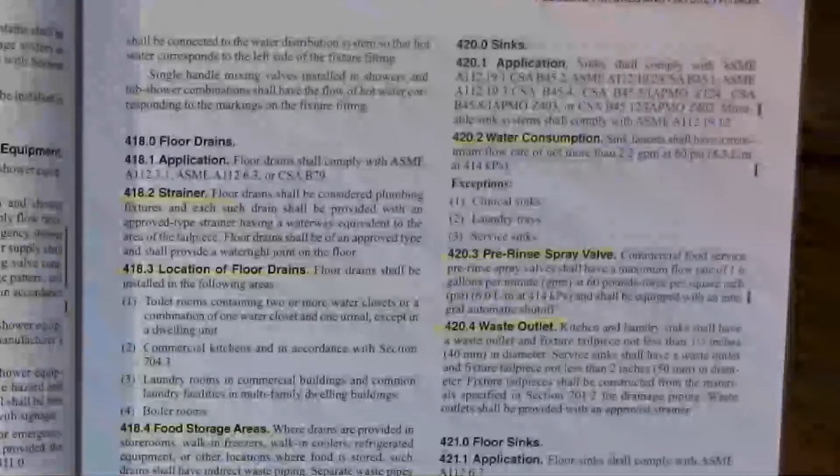Section 420, sinks, water consumption. Sink faucets shall have a maximum flow rate of not more than 2.2 gallons per minute at 60 psi. You may refer to the lav section of this video where they refer to the flow rate on a public faucet at 0.5 gallons per minute. So the sink is much higher, at 2.2 gallons per minute.

Exceptions to that limitation of 2.2 gallons per minute are a clinical sink, laundry sink, and service sink. Those all have different capacities. The clinical sink is essentially a water closet that's mounted higher on the wall for you to wash out bedpans.

A pre-rinse spray valve - commercial food service pre-rinse spray valves, you know, the one that's got that nice little loop on it for the handheld shower deal - shall have a maximum flow rate of 1.6 gallons per minute at 60 psi and shall be equipped with an integral automatic shutoff.

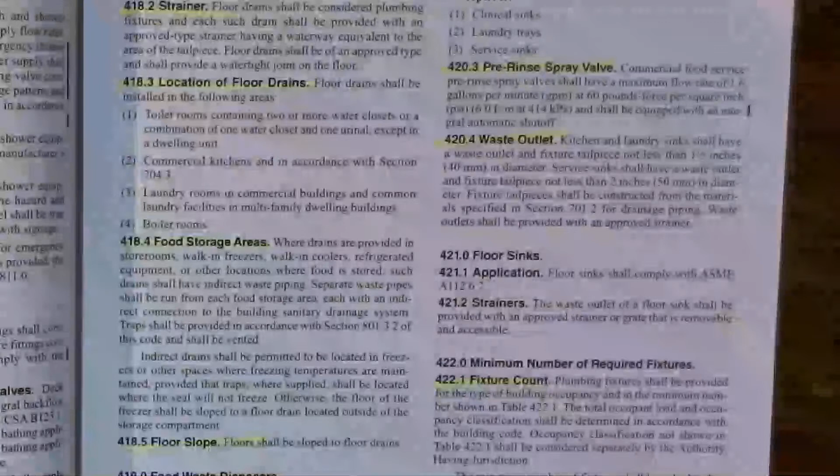The waste outlet: kitchen and laundry sinks shall have a waste outlet and fixture tailpiece not less than 1.5 inches in diameter. So that's your fixture tailpiece, coming out of the fixture, and the P-trap. The P-trap, all 1.5 inches.

But once that waste gets vented, it has to be 2 inch, okay? So service sinks shall have a waste outlet and fixture tailpiece not less than 2 inches in diameter - that's a service sink or mop sink. Most mop sinks are 3 inches, but the minimum you can have is 2 inches. The fixture tailpiece shall be constructed from materials specified in section 701.2 for drainage piping. A waste outlet shall be provided with an approved strainer.

Section 422, minimum number of required fixtures. After we are done with this code section, we're going to look at a table and I'll show you the minimum number of fixtures required per building type.

Section 422.1, fixture count. Plumbing fixtures shall be provided for the type of building occupancy and in the minimum number shown in Table 422.1. The total occupant load and occupancy classification shall be determined in accordance with the building code. Occupancy classification not shown in Table 422.1 shall be considered separately by the authority having jurisdiction.

The minimum number of fixtures shall be calculated at 50% male and 50% female based on the total occupant load. Where information submitted indicates a difference in the distribution of the sexes, such information shall be used to determine the number of fixtures for each sex. This code section in of itself will probably be changing in the next code cycle.

Once the occupancy load and occupancy are determined, Table 422.1 shall be applied to determine the minimum number of plumbing fixtures required. Where applying the fixture ratios in Table 422.1 results in a fractional number, such numbers shall be rounded to the next whole number.

So let's say I come up with, I have 30.2 males. It's not 30.2, it's 31. Okay, so you round up. For multiple occupancies, fractional numbers shall first be summed and then rounded to the next whole number. Okay, that's that section. Turn the page.

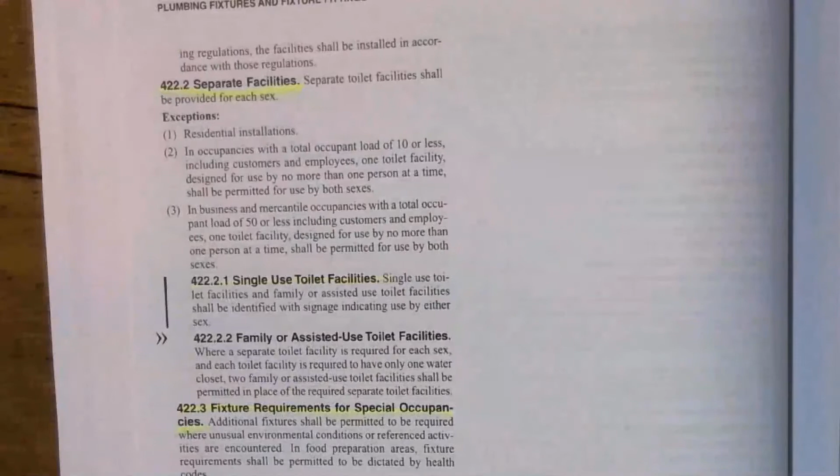Section 422.2, separate facilities. Separate toilet facilities shall be provided for each sex.

Exceptions. We are in trouble if this code section doesn't change, because how many sexes are there now? Last time I checked, like 32 different classifications of sex. I'm not going to get into that.

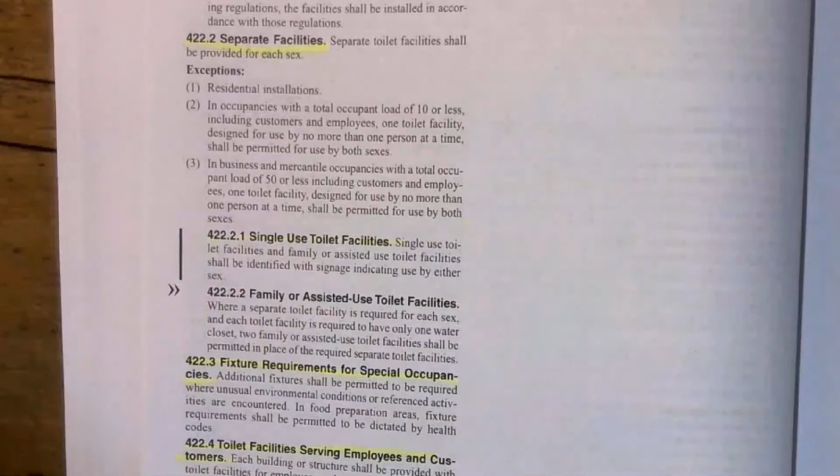Exceptions to the separate toilet facility provided for each sex: residential installations, obviously, you're not going to sit there and provide different restrooms for different sexes in your house. In occupancies with a total occupant load of 10 or less, including customers and employees, one toilet facility designed for use by no more than one person at a time shall be permitted for use by both sexes.

In business and mercantile occupancies with a total occupant load of 50 or less, including customers and employees, one toilet facility designed for use by no more than one person at a time shall be permitted for use by both sexes. Okay, so you have the occupancy in number 2 there, and the business in number 3. So if I have a business running an occupant load of less than 50, I can just use the one bathroom.

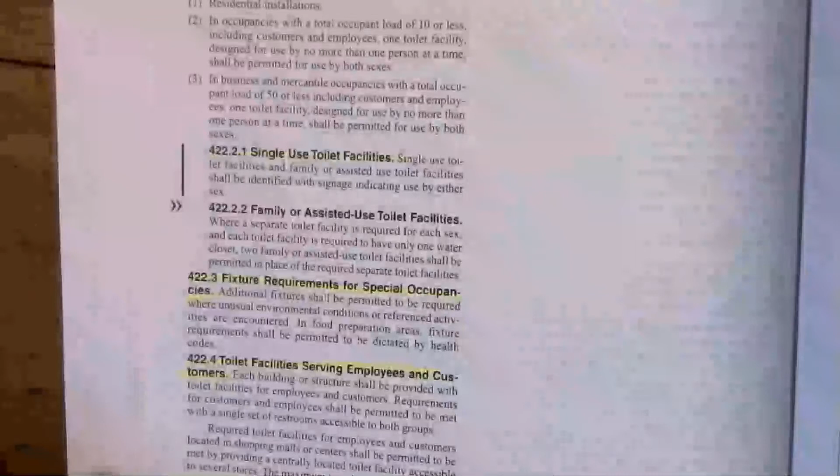Section 422.2.1, single-use toilet facility. The single-use toilet facility and family or assisted use toilet facility shall be identified with signage indicating use by either sex. So I can have a single-use toilet facility and say that it's a unisex restroom.

Fixture requirements for special occupancies. Additional fixtures shall be permitted to be required where unusual environmental conditions or referenced activities are encountered. In food prep areas, fixture requirements shall be permitted to be dictated by health codes.

Section 422.4. Each building or structure shall be provided with toilet facilities for employees and customers. Requirements for customers and employees shall be permitted to be met with a single set of restrooms accessible to both groups. Required toilet facilities for employees and customers located in a shopping mall or center shall be permitted to be met by providing a centrally located toilet facility accessible to several stores.

The maximum travel distance from entry to any store to the toilet facility shall not exceed 300 feet. Required toilet facilities for employees and customers in other than shopping malls or centers shall have a maximum travel distance not to exceed 500 feet.

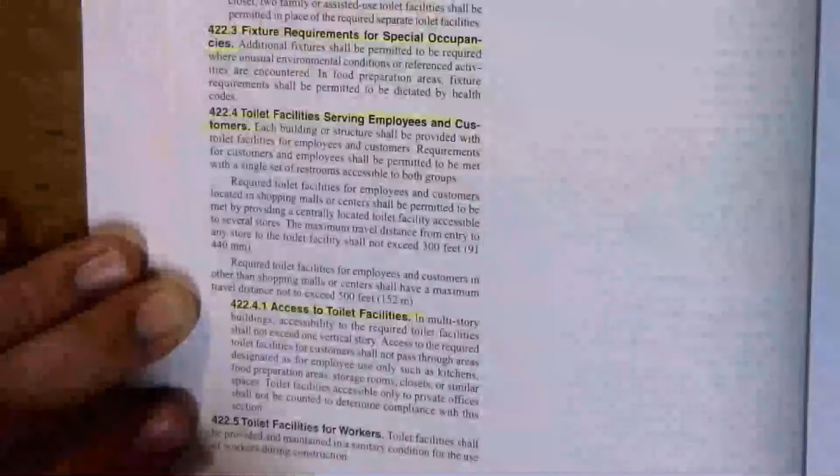Access to a toilet facility, 422.4.1. In a multi-story building, like an office building, accessibility to the required toilet facilities shall not exceed 1 vertical story. So if I'm on the 4th floor and there's no restroom, I can go up to the 5th floor and they'll have a restroom. I can go down to the 3rd floor and they'll have a restroom. Okay?

Access to the required toilet facilities for customers shall not pass through areas designated for employee use only, such as kitchens, food prep areas, storage rooms, closets, or similar spaces. The toilet facilities accessible only to private offices shall not be counted to determine your compliance with this section. So I believe that's it for that.

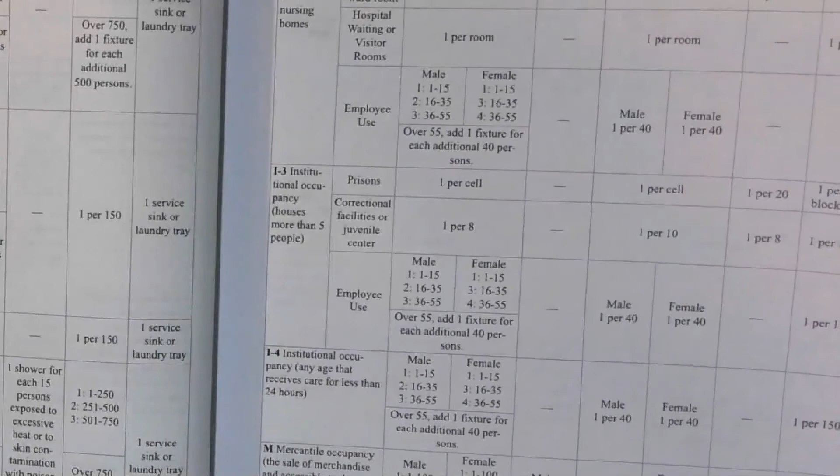Let's look at this table real quick. Let's see, what should I give you? Let's do a residence.

This is an example, and I'm just going to use this one because this is the basics. R3, residential occupancy, 1 and 2 family dwellings. So that's what we have. That's what we live in. That's our house. Okay, this column, water closets, fixtures per person.

Then they have note 3 there, but it doesn't pertain to R3. 1 per 1 and 2 family dwellings. So how many water closets do I need per house? 1. How many urinals? None. Damn it, I always wanted a urinal.

Lavs, fixtures per person, notes 5 and 6. We'll get to that in a second. 1 per 1 and 2 family dwelling. So far, I need 1 water closet, 1 lav.

Let's see what else I need here. Bathtub or shower. So I need 1 shower. And then other, for R3, I need 1 kitchen sink and 1 automatic clothes washer connection per 1 and 2 family dwelling.

So really, the bare minimum for a house is a water closet, a lav, a bathtub or a shower, a kitchen sink, and a clothes washer. That's all I need. So that's how you read this table. And again, this table is a couple of pages long, and it talks about several different types of buildings.

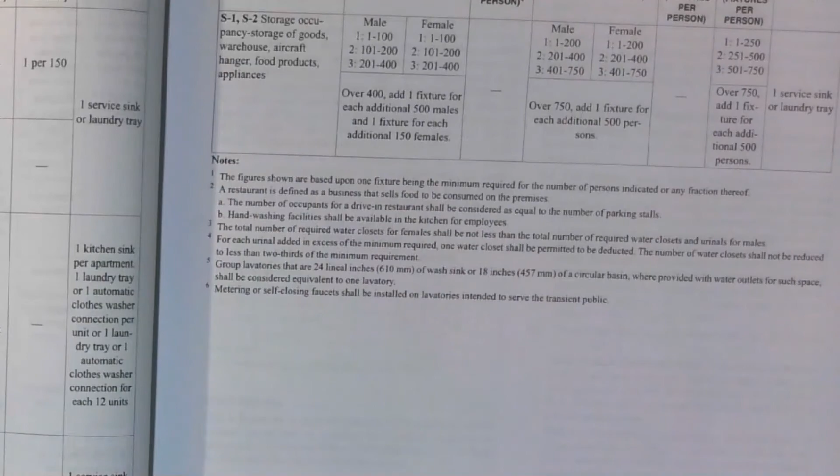And these are your notes. So what did we have? We had note 3: the total number of required water closets for females shall be not less than the total number of required water closets and urinals for males. That's obviously not going to happen in our little residence. And then we had notes 5 and 6, which I believe were for your lavatories.

So, lavatories. Note 5: group lavs that are 24 lineal inches of wash sink or 18 inches of a circular basin, where provided with water outlets for such space, shall be considered equivalent to 1 lav. And number 6: metering or self-closing faucets shall be installed on lavs intended to serve the transient public, which we already knew, because we talked about that in one of the other previous code sections.

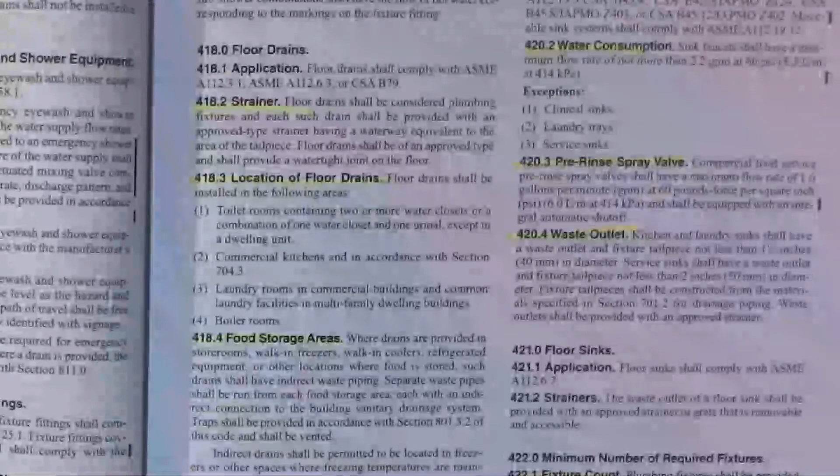So there you have it. There's chapter 4, an abbreviated Cliff Notes version, so to speak. And we will go ahead and close up shop from that chapter. I'll see you guys on the next video.